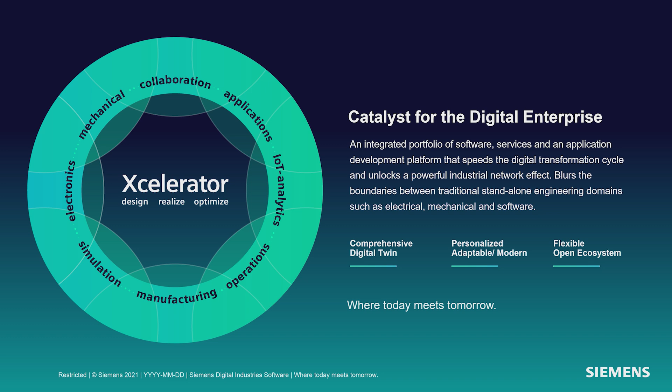Xcelerator is an integrated portfolio of software, services, and an application development platform that really speeds your digital transformation. So no matter what you're doing, whether it's mechanical, electronics, or manufacturing, we have you covered.

And it all starts with Solid Edge. Solid Edge is your on-ramp, if you will, to digital transformation. You're probably familiar with lots of Solid Edge capabilities for sheet metal, 2D drafting, etc. But maybe you need to go beyond that with the whole Solid Edge portfolio and Xcelerator, whether that's managing data, doing technical publications, simulation, or electrical, it's all there for you.

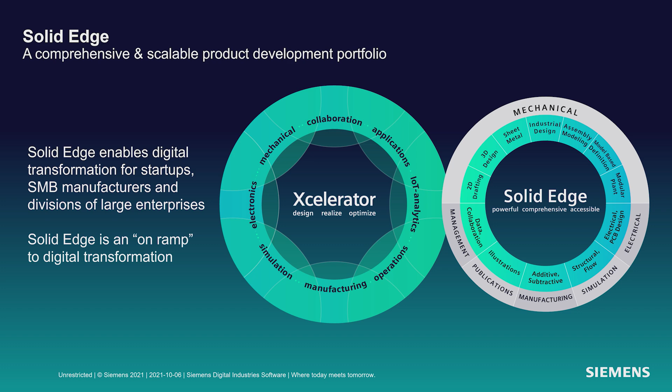What we see is customers doing amazing things with Solid Edge and the Solid Edge portfolio. For example, Innovates, a company in Belgium that makes mobile charging stations, is able to take Solid Edge and PADS Pro and use those two together to do great things. They don't find that level of integration in other engineering software.

And I love what Alan has to say: the software has a great holistic design approach, and that's what we like to see and how we can bring you more productive software.

So let's talk about Solid Edge 2022 itself—engineered to grow your business. There's so much in it, we'll only be able to cover some of it today.

Things like Xcelerator Share, allowing you to collaborate with customers and suppliers. Or CAD Direct, integrating CAD files directly into your system from other systems and bringing them directly into Solid Edge seamlessly. Point cloud visualization, big scans of plants, being able to design your equipment in context of that big scan. And Solid Edge Design Configurator, a whole new capability to configure your designs quickly and easily for your customers.

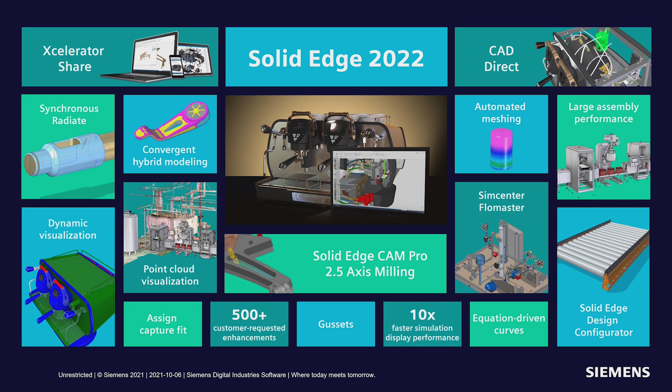Now, as we go through our discussion today, we're going to be using two different data sets because there's just so much to see, such a broad range of functionality with Solid Edge. We'll be working with an espresso maker from Fiamma, a company based in Portugal, and we'll also work with a product from Bergner, a company based in Switzerland that makes chemical and pharmaceutical custom machinery.

So let's start by talking about mechanical design, and let's start with CAD Direct. CAD Direct lets you seamlessly integrate data from other systems into Solid Edge without translation and automatically take updates. We'll also talk about convergent modeling—we've been working on this technology for several years now, and it's getting very sophisticated: the ability to integrate mesh models with BREP or solid models in one seamless way. So let's look at that with Jeff now.

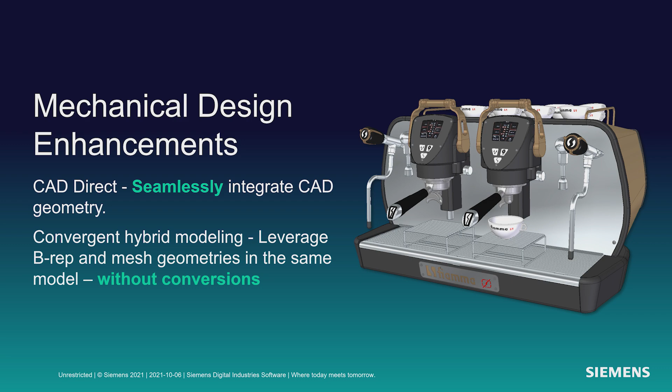Thanks, Dan. First, we'll take a look at subdivision modeling. In this example, we will add support members to the base of the Fiamma espresso machine. The new subdivision bridge command can be used to easily connect edges or faces of subdivision cages and create a lofted structure between them. Here you see an example of that, where we'll select the faces of each subdivision model that we want to loft between.

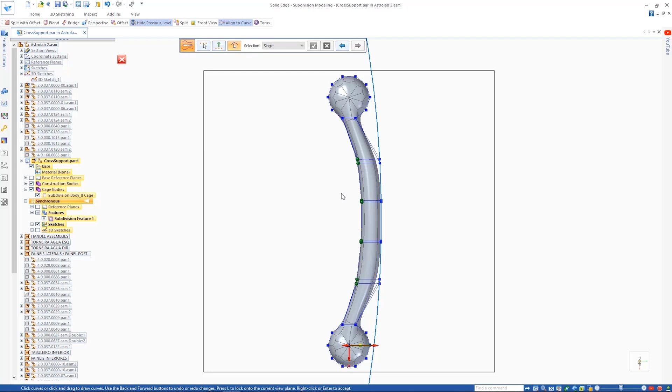Then we'll add the control curve to help us further define the overall shape. Next, we'll be using the new Align to Curve command to further define the shape of the part. Simply by selecting the cage vertices to define the direction and then pick the curve, it automatically maps those vertices to the curve. You can even sketch your own shapes and curves inside the context of the command. Even gesturing is supported for inking of your curves.

Here we'll show another option called Split with Offset to add some pockets to support the rubber feet of the support. A simple selection of the edges with an offset allows you to pull to create the pockets for those rubber feet. Next, we're going to replace the handle with a new design that's been 3D scanned.

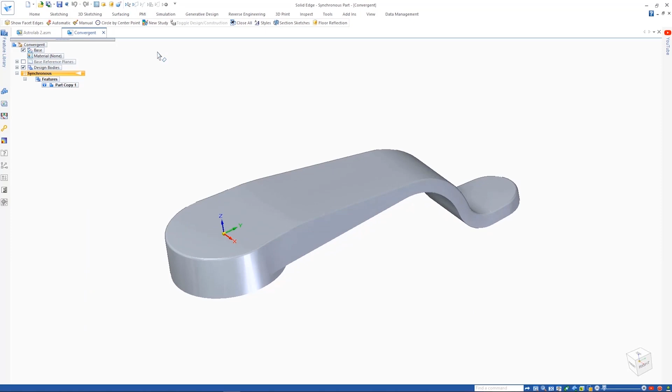This result is a mesh model that we import. We can visualize the mesh with the new Show Facet Edges command. In this case, we'll clean up this model a little with the Remesh command.

Now, faces have automatically been identified and the sketches are added to the planar faces of the mesh. We add a series of cutouts in order to reduce the weight and improve the appearance of the part. Notice the resulting geometry isn't faceted. Solid Edge now seamlessly combines mesh and B-rep geometry in the same body or part.

We'll add additional cutouts to reduce the material. Once the cutout is complete, it can be patterned.

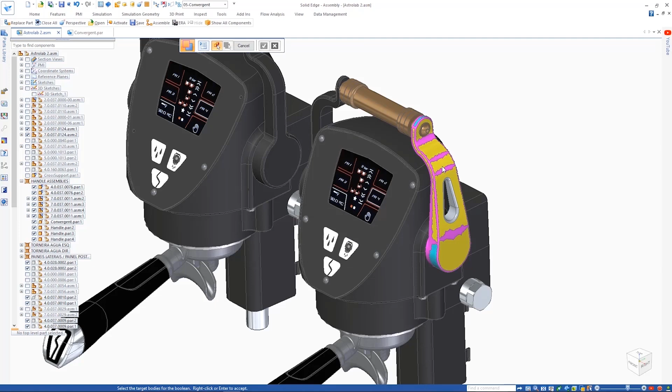Finally, we're back in the assembly where we'll replace the current handle with the new meshed handle. But you'll notice the mounting holes are missing from the component. This can easily be solved by doing a Boolean operation using the mesh model as the target and the components from the assembly as the cutting geometry. These new capabilities further enhance your ability to use mesh models in your design process.

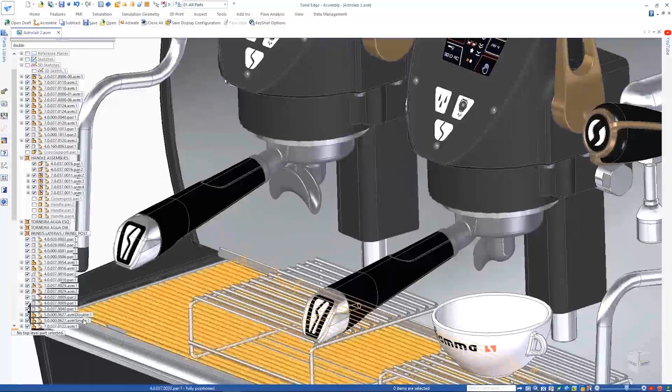Now we'll use the new component finder in the Solid Edge Pathfinder and we'll search for the desired filter holder handle, which is designed as a family of assemblies. One of the versions is designed for a double espresso shot, the other is a single espresso shot.

Opening the drawing of this assembly, we'll use the new family of assemblies parts list to place a table and detail the parts used for each member.

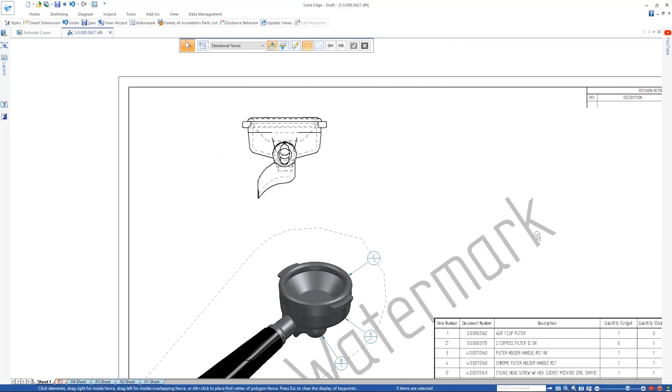Now we'll look at some enhancements to dimensioning in Draft. Dimensioning to virtual intersections or arcs of rounded edges is now supported. We can also choose to display projection lines to those intersection points. Watermarks are also used to convey important information on the drawing. We'll change the existing one so that it retrieves the document status for the drawing property text.

The new CAD Direct command enables us to use foreign CAD data, geometry, and assemblies in Solid Edge directly without requiring any translation. The water boilers that you're looking at here were designed in NX. Once inserted into Solid Edge, they can be positioned just like any other assembly.

Since we need two of these, we'll simply copy one to create the second. Notice the boilers aren't quite in the right location. We'll go back into NX and make the changes needed to the mounting bracket such that they'll be in the right position. Since Solid Edge has associative links with NX, a simple update brings the changes in.

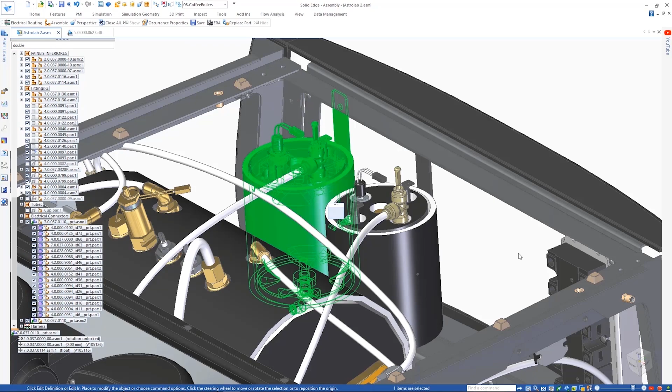Next, we'll look at electrical routing enhancements. Solid Edge now supports the display of bicolored wires, allowing us to change the display of this ground wire to be striped green and yellow. Various pattern types are supported as well, including single stripes, helical stripes, zebra stripes, and dashes.

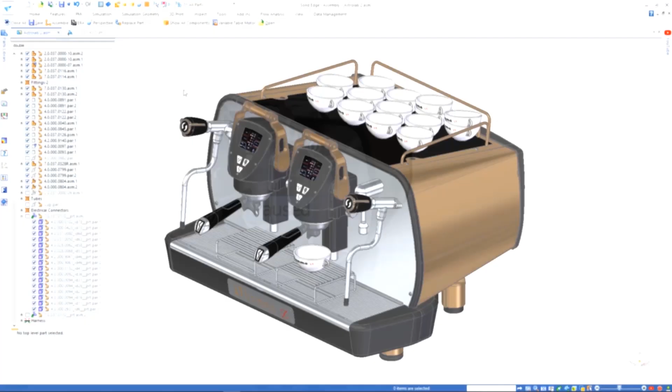And finally, KeyShot, the best-in-class rendering solution, also sees some impressive updates. Decals defined in Solid Edge may be automatically transferred, saving time and effort, which can be seen here on the logos and the cups in the digital scene.

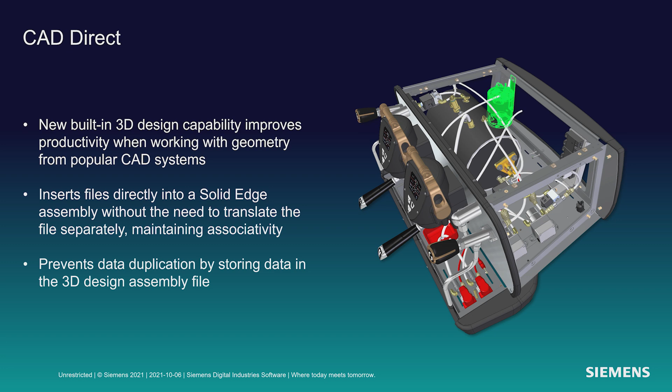It's all CAD Direct. And what about convergent hybrid modeling? You saw taking triangle meshes and B-rep solid models, pulling that all together into a single cohesive model, significantly reducing your design time.

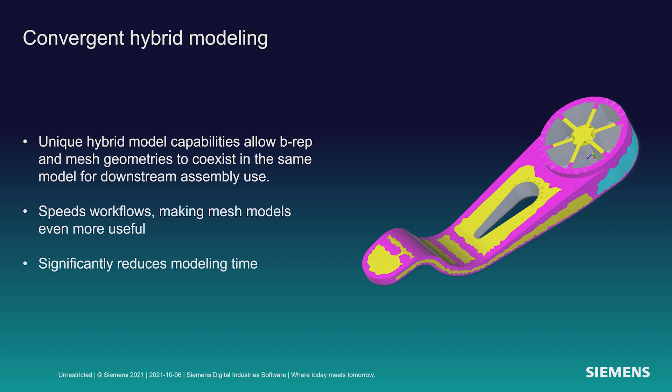Let's talk about some other mechanical design enhancements, some other great things in here. Point clouds. It's becoming fairly common to be able to scan an entire plant or factory and bring that data forward. We can now bring that data into Solid Edge so that you can design in the context of that factory or plant.

What about large assembly modeling? We see people first building parts, then assemblies, then whole factory lines. Assembly modeling in Solid Edge keeps getting faster and faster and faster, best in the business. And Synchronous Radiate, an amazing new command within the synchronous modeling environment that allows you to deal with radially symmetric parts and edit those effortlessly. So let's take a look at that now, Jeff.

Thanks, Dan. The first thing we'll do is take a look at a new assembly preview mode. This mode allows you to very quickly open Solid Edge components and very large Solid Edge assemblies lightning fast. In preview mode, you can manipulate the view, show and hide components, and apply display configurations. In this case, we'll isolate the most critical part of the model we want to edit using a configuration, then tell the system how we want to open only the components to be edited, saving you time and memory.

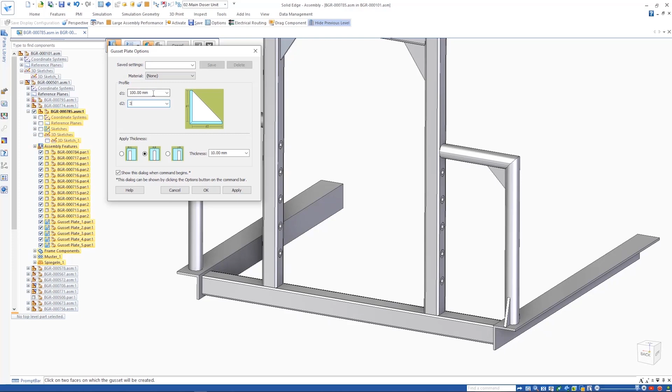Another time-saving enhancement is the gusset command. We now allow you to automatically add gussets to a frame structure. Here you can see the user interface. You can define these gussets in any shape and size you desire. Then you simply select the frame element, position where the gusset is to go, and the system automatically creates the component there.

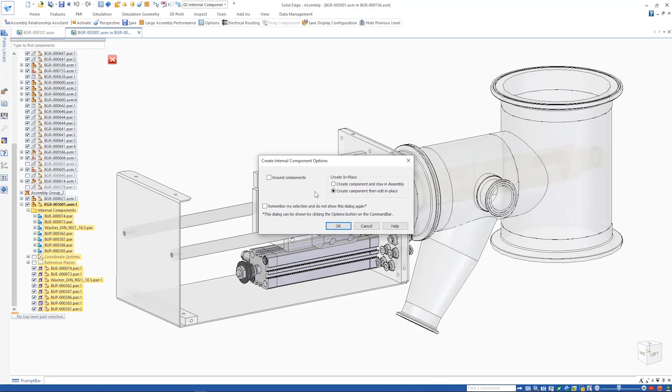If we continue down the internal components theme introduced in the last release, we now allow you to create an internal component and actually create the model geometry directly inside the Solid Edge assembly. We've introduced this new assembly modeling capability that gives you the ability to create the entirety of a design without any need for an external file. Here we have a pneumatic cylinder which will be imported as an internal component. We need to add a bracket to this assembly, but since it's a purchased part, we'll just create this as an internal component, again saving the need for external tracking of files.

If you'll notice during sketching, a pop-up menu allows you to quickly access commands relevant to your selection. This is new for Solid Edge 2022.

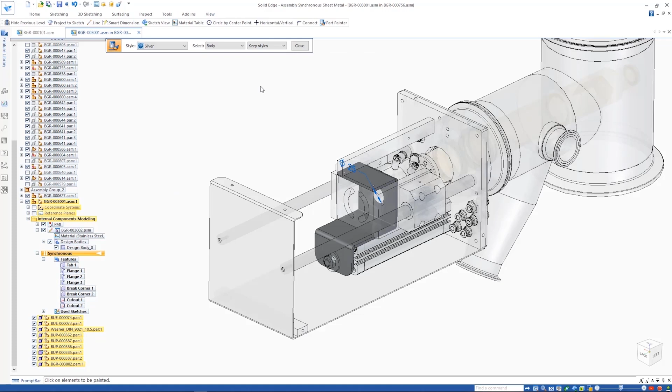So we've defined our sheet metal part. We also have to give it a material definition and a gauge definition. In addition, we're able to create geometry and reference the components from the assembly, whether they're internal components or real components in the assembly. So again, we're defining the material gauge for the sheet metal component, and we've defined this component completely inside the context of this assembly.

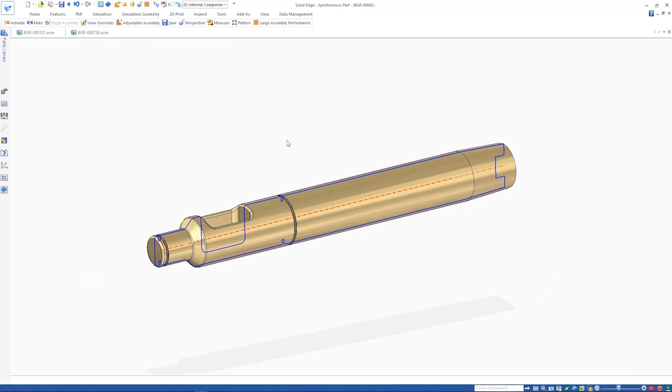You're also able to drag the component, doing animations using both internal components as well as the real component combined. The new component finder speeds up the process for locating parts within the assembly. You simply key in the name and it finds the list quickly. Here we found a shaft, and we used the new radiate command to edit the radius or diameter of the shaft component. You simply select the shaft, putting the component in the select set you wish to change, and then Synchronous does the rest.

In this particular example, we want to include the pocket in the radiate and the offset option. Simply selecting that pocket and including it allows that to be done.

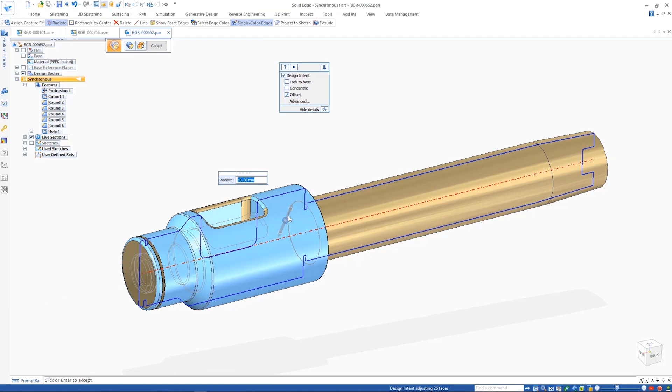A new Assign Capture Fit command allows relationships to be predefined on a component while in the context of the part. Here you can see that Capture Fit relationships already exist. We'll add a new Capture Fit to the collection and save it to the component. When I place the handle into the assembly, all you have to do is select the component and select the mating components you want to mate it to, and the handle automatically snaps into place. It's as easy as that.

Here's another example where we have a handle that needs to snap to 5 new locations. Again, the Assign Capture Fit makes it easy.

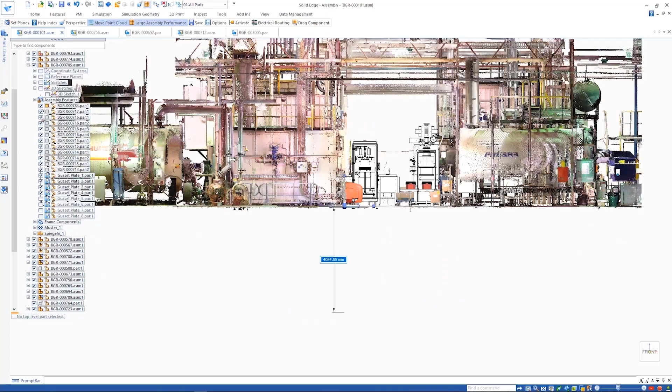Solid Edge now has the ability to place point clouds within the context of your design. This allows you to reference and visually indicate where your components will be placed inside a large assembly. Solid Edge supports multiple point types and then allows you to position your component inside the context of the plant design. The point cloud can be easily repositioned. Clipping planes can be used. You can even measure to the location of the point clouds relative to your design.

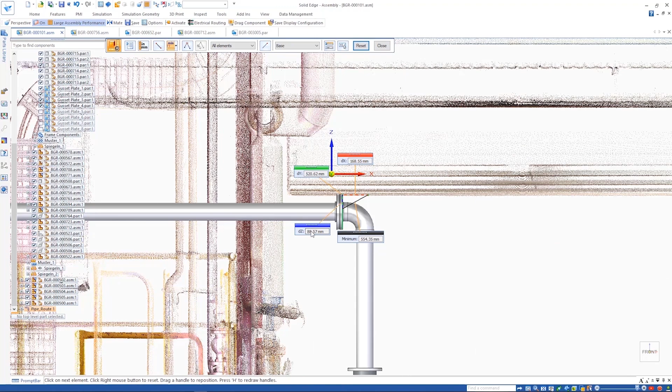Here you see that the tank component was in the wrong position and it was moved to match the point cloud and the plant definition more precisely. And that's it, Dan. Back over to you.

All right, thanks, Jeff. So many great things to see in there. But again, something I really want to highlight is a game changer: point cloud visualization. The ability to take in scans, gigantic scans, millions or billions of points, and be able to look at those in the context of Solid Edge and integrate your design directly in there, designing in context of that point cloud. As you can see, they're full color, they give the full feel of the plant or factory. Really amazing stuff.

And we see that our customers really love this new technology. Benjamin at Bergner, for example, eliminated a lot of tedious manual effort. It's just so much easier with the new point cloud technology.

And what about large assembly modeling itself? Order of magnitude increase in large assembly modeling performance. So you have that preview mode where you can very quickly bring up the assembly, very massive assemblies, decide what you want to work on, and then just bring in that bit of the assembly. Really improve your productivity.

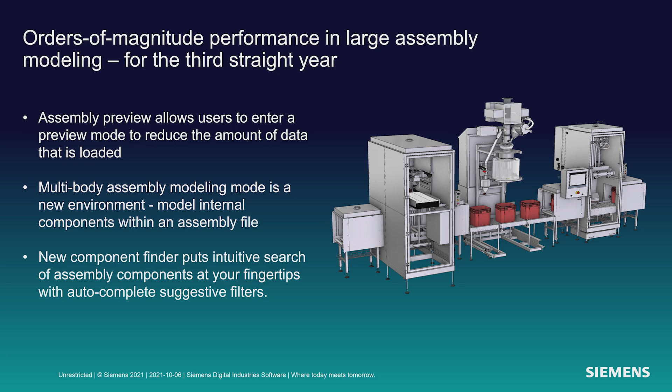We see that folks are already taking advantage of this. Our beta customers have been using this, like Luca Carminati at CMS, doing much faster work and saving a lot of effort on their designs. And what about synchronous radiate? Really amazing stuff if you're working on axisymmetric parts. Being able to make edits without having to do any extra effort happens almost magically. Great stuff.

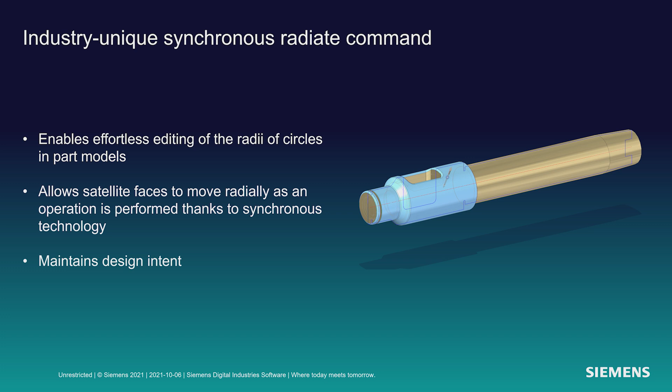Okay, next up is Solid Edge Design Configurator. I'm very excited about this. If you're doing any engineer-to-order or configure-to-order type products, the ability to very quickly change your designs and have new quotes very quickly. Let's take a look at it with Jeff.

Thanks, Dan. The new Solid Edge Design Configurator allows you to design multiple product variants directly in the context of Solid Edge. In this example, we'll configure a variety of conveyor designs. The first step is to select the component to be configured. The next step is to define the master input parameters of the configuration. In this case, it's the length and width of the conveyor plus the pitch of the rollers. Values can be easily added for any parameter, and images can be included to help the end user identify the needed inputs when configuring the model.

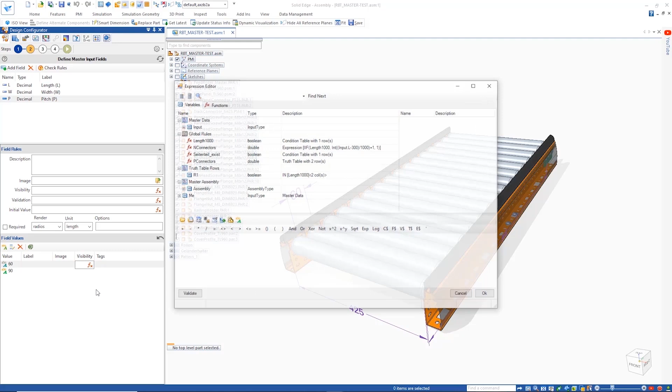Defining a new input parameter for the pitch of the conveyor, we'll quickly configure the name, type, label, and render style to use radio buttons. The pitch value of the conveyor can be customized between 60 and 90. However, since different lengths of the conveyor require different pitches, visibility rules need to be applied. This is done using a simple expression to define the intelligence. Here, the rules are being validated to ensure consistency and proper definition have been made. The function is copy and pasted to allow you to easily reuse formulas without including them again. Skipping to the last step of the configuration, we can see the configuration form is properly created.

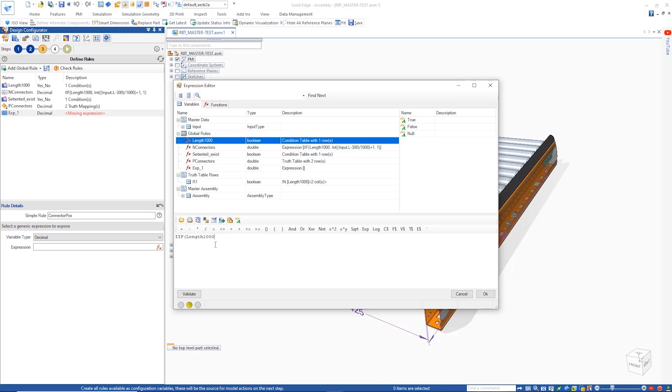Next, defining the rules for the process. Here we have multiple rules to drive and configure the connectors at the bottom of the conveyor. We'll use a combination of simple condition and expression rules and a truth map table to work out the number and positions of the connectors. All rules can be quickly validated. Finally, we specify the actions to be taken. Here, variables are set and components are replaced to satisfy the input parameters.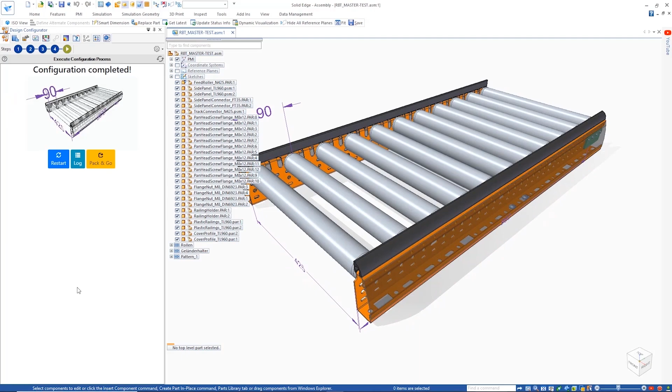A rename model action will ensure our final assembly is renamed appropriately and also creates the other necessary outputs, for example a step file as shown here. Now we can run it quickly and create as many configurations as needed. A newly generated configuration can easily be shared with Pack and Go. The configuration logic is all stored within the CAD model. There's no need for any further plugins or external resources.

And with that, Dan, I'll hand it back to you. All right, thanks, Jeff. So as you see, with the Solid Edge Design Configurator, you can accelerate your configure-to-order and engineer-to-order processes and create compelling sales proposals. You'll also see that it really error-checks for you and creates a nice dialogue for your users to interact with, so you can very quickly configure new products.

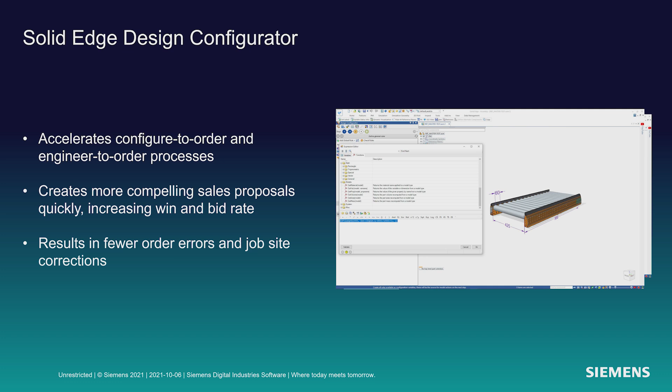What about CAM? Solid Edge CAM Pro. Tried and true technology developed over the last 40 years. A lot of users using it today and enjoying the benefits of it. But what if that technology was available to all of you, all Solid Edge customers on maintenance? That's what we want to introduce to you today with Solid Edge 2022. Jeff? Thanks, Dan.

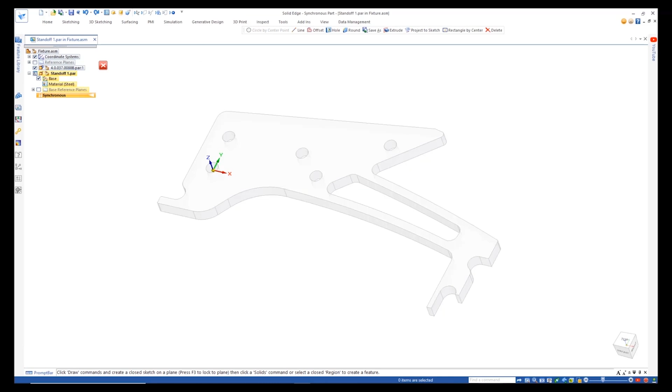Here we'll be using Solid Edge CAM Pro to create the manufacturing toolpath for the rear legs of the Fiamma espresso machine. First, we'll use the Solid Edge assembly tools to create the shape to represent the stock parts, and also the parts that form the fixture assembly, which includes the standoff plate as well as additional fixing holes from the standard database. We'll also make use of supplier catalog in 3D Find It to get the appropriate socket head cap screws to fix the component in the fixture. So as you can see, Solid Edge is a great CAD for CAM tool.

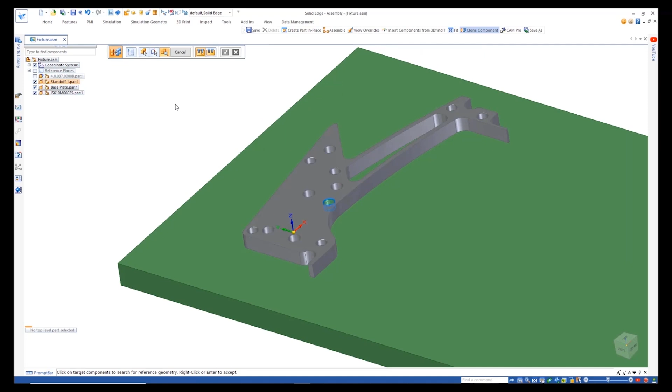We'll need to machine this in two separate steps. Step 1 is to mill the pocket and drill the holes, and step 2 is to machine the profile. One click will send the entire assembly to the Solid Edge CAM Pro application. Note that associativity is maintained to the complete assembly, so if there are any last-minute changes, we can quickly update them and continue the NC programming process.

New for Solid Edge CAM Pro is the ability to create adaptive roughing toolpaths for 2.5-axis operations. This is included at no additional cost. These are faster than traditional toolpaths and extend the cutting life of your tools. Notice the advanced graphic capabilities for validating your toolpath.

Here we'll create spot drilling operations for the 5 holes in the support. Notice the graphical pop-up hints that help us with operation selection. Graphical helps are also available for geometric selection. Each time we select a hole, we get a preview of the machining that will take place. Again, at any point in the process, we can get visual feedback on our decisions.

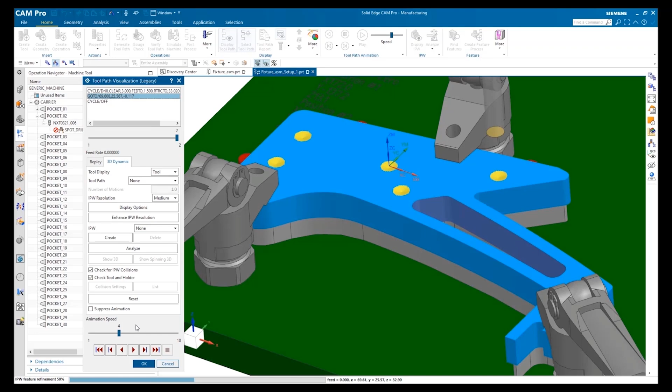Now that our CNC program is complete, let's run through the whole visualization process. Notice you get to completely visualize the entire machining process before committing it to machining.

Of course, no job is finished until it has been post-processed for a specific machine. That's where PostHub comes in. It's an online database of over 1,200 post-processors. You can easily filter and find exactly the one you need. Also, PostHub is constantly updated, bringing you the most recent tools.

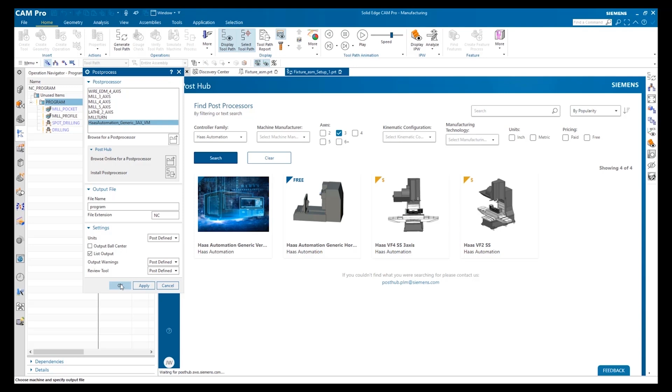All right, thanks, Jeff. I'm really excited about this. There's a great heritage in Solid Edge CAM Pro and our machining technology over the last 40 years. Many people enjoying that technology, but now every Solid Edge user who's on maintenance can enjoy that technology and work with Solid Edge CAM Pro.

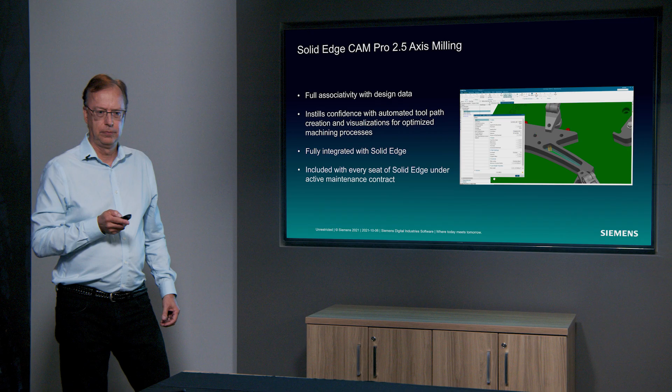Next up is Xcelerator Share. I'm super excited about this. It's a functionality in Solid Edge that allows you to collaborate with colleagues, suppliers, customers very easily. Nothing for you to set up, works on all sorts of devices. So let's take a look at that.

Thanks, Dan. Xcelerator Share allows you to import your CAD models into a secure cloud location. Within that context, you can view, you can rotate, you can show, hide, you can 3D section, you can even do measurements and markups. Here, a reviewer has identified the need for some change in the design.

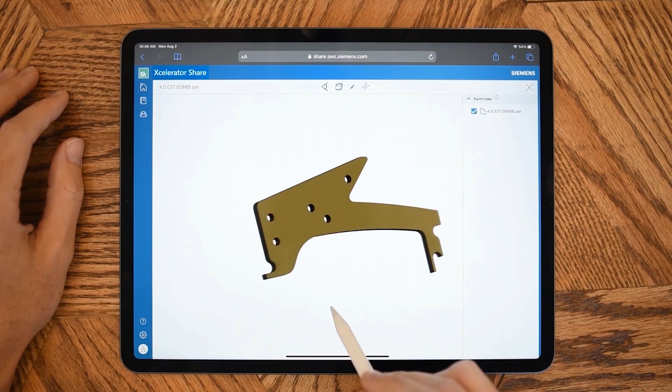The location of the change is identified by a sticky note and a place describing the needed change. Xcelerator Share offers maximum traceability, as all markups are recorded, enabling conversations back and forth on any of the issues you're tracking. It also records who made the markups and when it was made. We can also easily go back to the markups at any time.

Simply save your markups and send them to the designer for review.

With Share, you can also directly connect to Solid Edge, synchronizing your data from your desktop to the cloud. Here we have the same project on our desktop. It's represented simply as a folder. Any data that we have in this folder will get synchronized in the background.

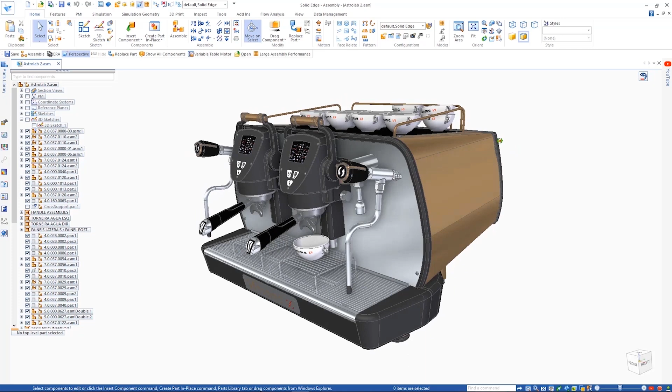In Solid Edge, we can securely sign in to Xcelerator Share and see those same cloud-based projects. The Espresso machine can be opened and we can go right to work on the part in question. The designer can easily access that same markup in the cloud directly from within Solid Edge.

Once completing the change, another markup continues that two-way conversation and collaboration with other stakeholders so that the issues are tracked appropriately.

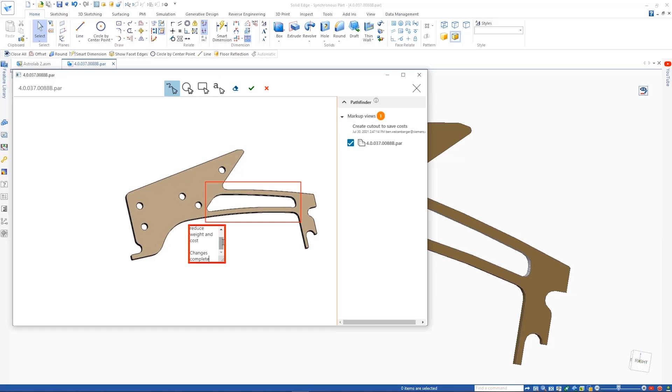Another great feature of Xcelerator Share is the ability to share a project with anyone. Simply enter the email address of the person with whom you'd like to share and choose their access permission level. Here we can choose View, or View and Download, or Edit and Download, depending on how you want to protect your intellectual property. We'll share this design with one of your colleagues and our customers and give them the appropriate access.

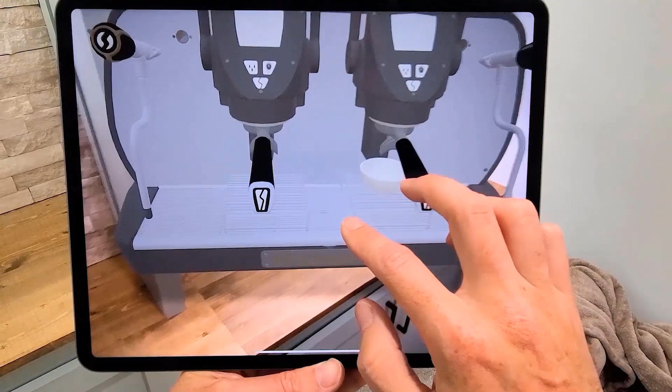Finally, with the Share Augmented Reality feature, you can see exactly how your designs will look in the real-world environment. Snap the design onto any surface seen in the camera lens at the correct scale. The finger gestures can be used to manipulate the model and easily visualize what your design looks like in a real environment. So back over to you, Dan.

Thanks, Jeff. All right, Xcelerator Share. Really great stuff. Next generation cloud-based collaboration that allows you to work inside your company with colleagues or work with suppliers, work with customers. Nothing for you to set up. Works on every device. So whether you have a Mac or an iPad or a Chromebook, it works on all those devices with no special setup. And you saw the ability to write notes that are automatically converted to text, share those markups. Very exciting stuff.

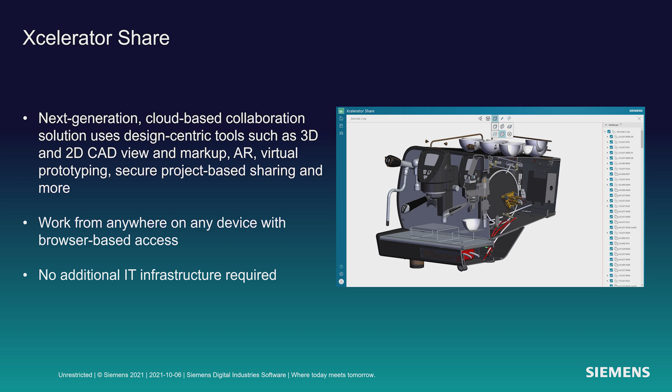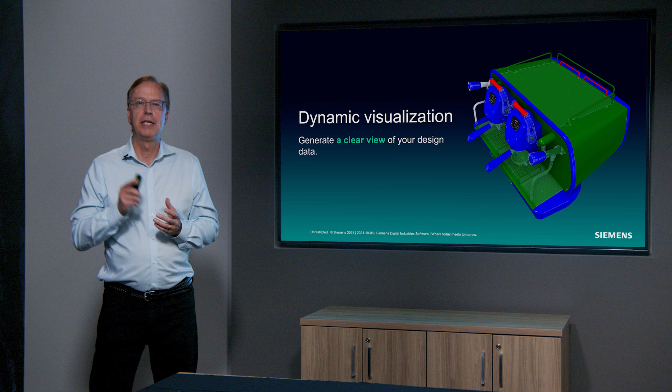Next up's dynamic visualization. You make complicated products, large assemblies. How do you know which parts are from which supplier? Or which parts are of what material? Dynamic visualization will help you with that problem. Let's take a look at that now with Jeff.

Thanks, Dan. Dynamic visualization gives you great capabilities to generate visual reports of your assembly. So what we'll do here is open a Solid Edge assembly using Teamcenter Active Workspace. We'll create a visual report based on the component supplier and material definition. The first thing you'll do is add columns to the user interface, those columns that you want to filter on. Here we've added suppliers and material. For each of those, we'll filter on the particular material and supplier we're interested in visualizing.

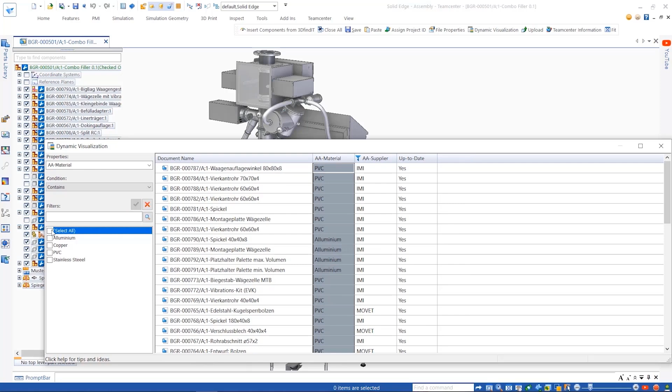Once the rule is created, you simply apply the rule, and the model changes display to show you the rule definition. Here you can see in red the components based on that supplier and material selected. You can also export these rules and import them into various assemblies.

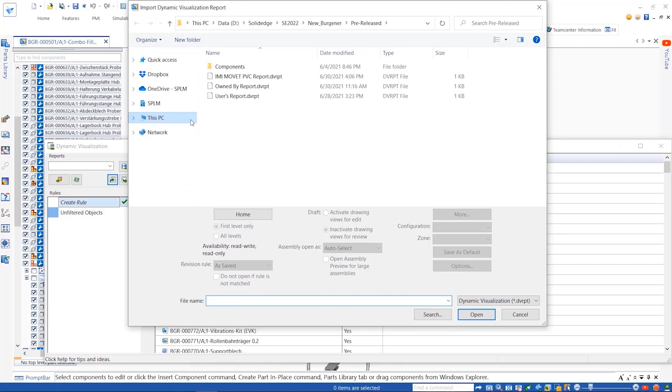Here we have a rule that allows us to identify which user created which components. We'll modify that rule to allow us to identify work in progress as well as components created by Pat. We can highlight those, select them, and then go into edit mode. Here we'll see we need to add a warning light to this box.

We use 3DfindIT to find the particular light from the particular supplier that we want. Once we've identified the right one, we'll generate the component in Solid Edge. But in this case, the component already is contained in the Teamcenter database, so instead of replicating that in the database, we'll simply reuse what's already there.

Also in Solid Edge 2022, we were able to take advantage of the project definitions within Teamcenter. Here we can see we've assigned the components to a particular project in Teamcenter.

The Solid Edge built-in data management also supports dynamic visualization. Here again, we'll display the assembly coloring based on the material type to ensure that we have the proper materials throughout the model.

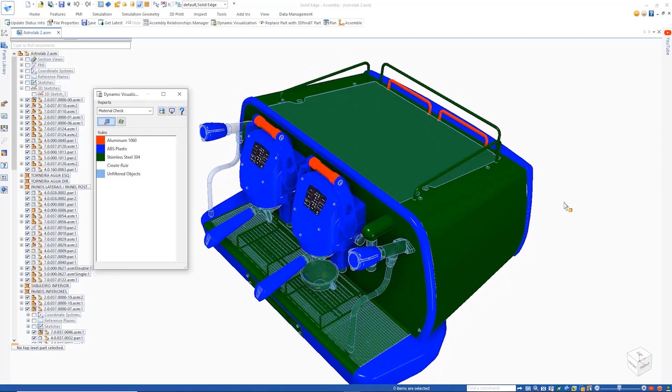So again, the rule is applied, visually it's displayed, and you'll notice that the red handles should be green. Those should be stainless steel and not aluminum. So we'll send those back to the designer to be reworked and have the proper material applied.

Once applied, we can then do an auto update of the status, and the system will automatically show us the status and then update to get the latest component. In this case, the handles are updated with the proper material. We will rerun the same rule, and you'll see that now the handles are green and therefore in the correct material.

Another nice enhancement is that we've modernized the file properties dialog. You can see here it looks much more user-friendly and lets you easily create new custom properties as shown here.

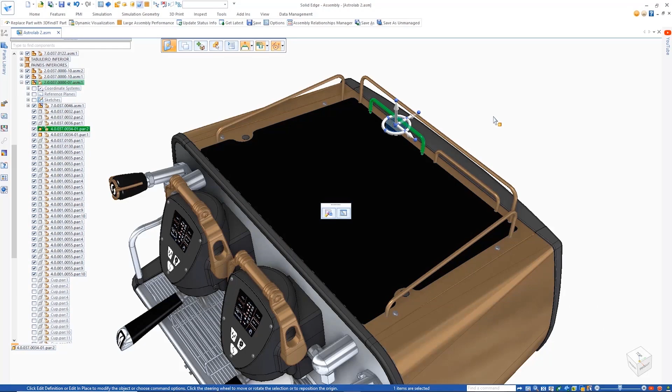This next example will use replace part with 3DfindIT. 3DfindIT has the ability to take a component and use that component's geometry to search the catalog database for similar components. Here, once the component is found, we identify the supplier we desire, and with a few simple clicks, that component is inserted into the assembly, replacing the previous geometry.

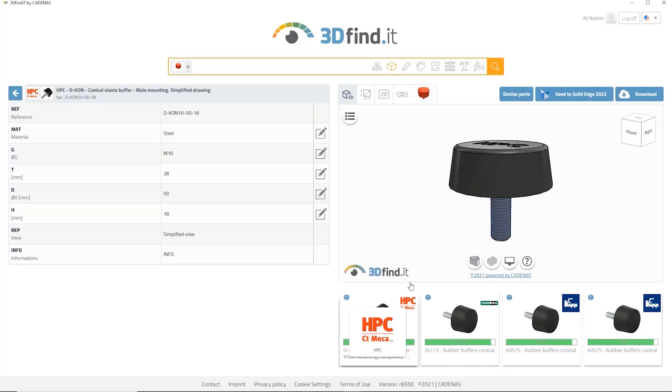And lastly, we've added Pack and Go directly to the Windows Explorer UI, making it easy for you to share your data without having to open the assembly within Solid Edge. That's it, Dan. Back to you. All right. Thanks so much, Jeff.

So many good things you saw in there with 3DfindIT and the ability to replace components, search directly using geometric shapes, and so on. But I want to highlight to you this dynamic visualization. Being able to say, well, what supplier do I have for the different components? Color code for me all the things that are stainless steel. Color code for me all the parts that are in work. Amazing technology that would save you a lot of time and money.

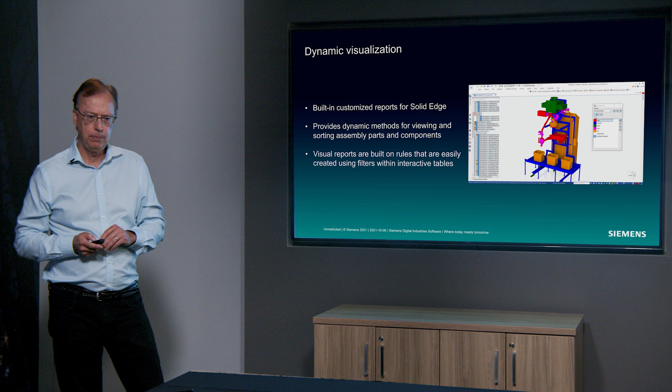Next up is Solid Edge simulation. We have some great enhancements in there, some game-changing enhancements in terms of the ability to remesh parts using the body mesh command, and some other great tools. Let's take a look at those, Jeff.

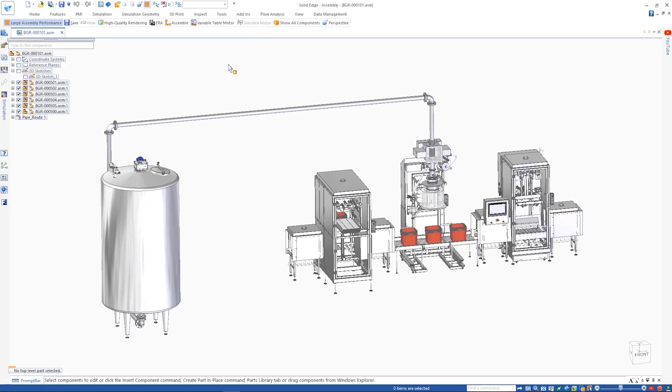Thanks, Dan. We'll start by looking at a new boundary condition allowing the user to apply hydrostatic pressure to a model. We'll apply a configuration that gives us the geometry of interest. Here we want to look at this tank on the left and do an analysis, assuming that tank is filled with liquid.

So we'll create a static study, and in the definition of the loads, we'll use the new hydrostatic pressure command. All you have to do is identify the surface to apply the load, identify the depth of the liquid in the tank, and then provide the density of the liquid within the tank. Solid Edge will do the rest.

To finish the analysis model, we'll apply constraints to the bottom of the tank and then perform the meshing and analysis as needed. Notice on the new mesh dialog a body mesh. This is proprietary technology from Siemens that does a really good job meshing complex models. Some things that couldn't be meshed before can now easily be meshed much quicker and much more reliably than in the past.

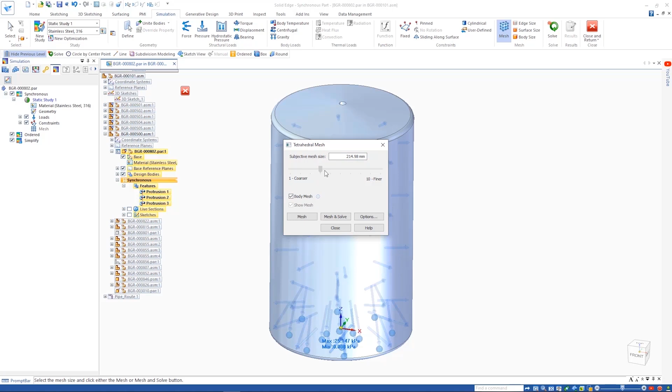So here you see the result of the hydrostatic pressure load in this tank. We'll change the liquid level in the tank and run the analysis again just to validate that this tank will withstand the pressure exerted on it in production.

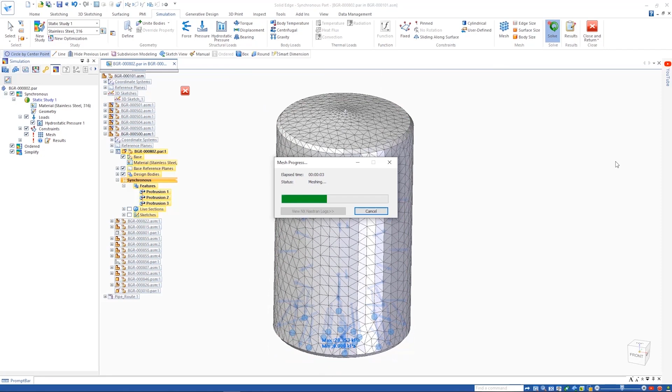There you see the animation of the stresses, and they show up in the obvious place at the bottom of the tank where you might expect.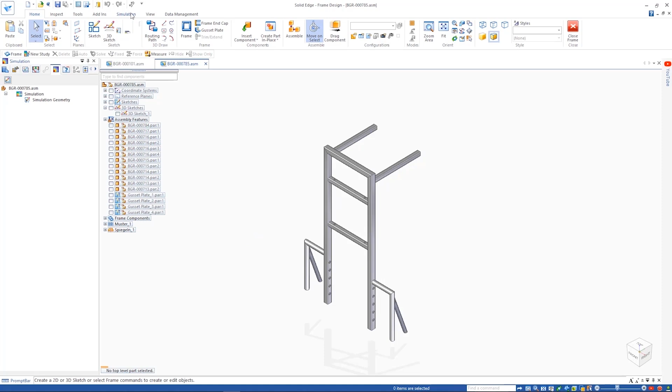Another great enhancement we have in simulation for Solid Edge 2022 is improvements to beam meshing. Here we're taking a frame structure and creating beam elements for the finite element analysis. Notice that the rigid connectors were automatically placed. We've improved significantly our ability to create those connectors automatically without any user intervention.

Here the user has selected the bottom and changed some of the parameters to get the rigid connections correct. The bottom of the frame is then fixed, loads are applied, and the analysis is run.

Once complete, you'll see some enhancements to the output, to the post-processing for this model. We now can post-process and display contours using von Mises stress, and we've also improved factor of safety stress contours based on those same von Mises stresses.

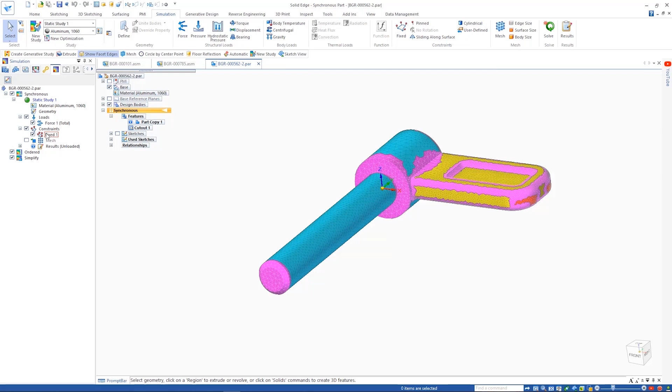Now back to the assembly, we're going to do another analysis on the pin within this assembly. You notice this pin is a mesh model. Simulation can now perform analysis on mesh models. You simply apply the boundary conditions, the loads and constraints where needed, and run the analysis. Here you see the result for the pin on this mesh model.

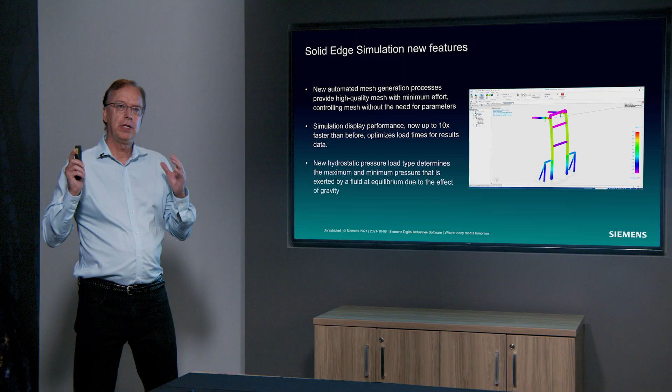Lots of great new things in there. Obviously, the hydrostatic pressure load takes a lot of work out of the process for you. The way the beam elements are automatically connected together, great stuff. But also that body mesher—you can take a mesh that's very irregular, very difficult, and remesh it with the body mesher. It's a game changer for analysis.

Next up is SimCenter FlowMaster for Solid Edge. If you're doing any types of products where you have piping and you need to do analysis on the piping or design on the piping and the flow within the pipes, SimCenter FlowMaster for Solid Edge is for you. Let's take a look at how it works with Jeff.

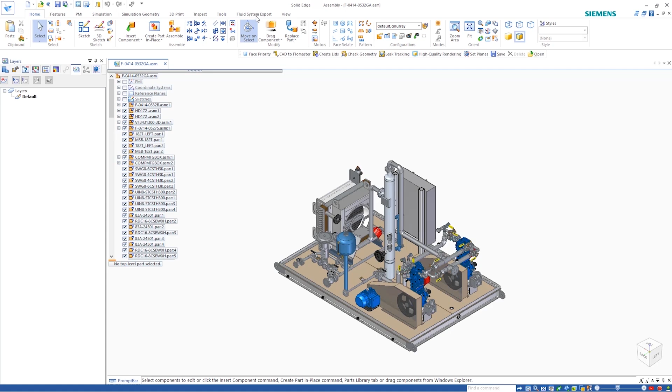Thanks, Dan. The unique CAD to FlowMaster technology extracts the geometry from the Solid Edge assembly and automatically creates the corresponding fluid volume that exists inside the pipe runs and components. During the process, a face can be selected to give the length scale and convert the system to a subsystem.

The abstraction process is fully automated. There is also full control over the fidelity of the model, which can be adjusted with the slide bar. Individual elements can be inspected, deleted, and merged.

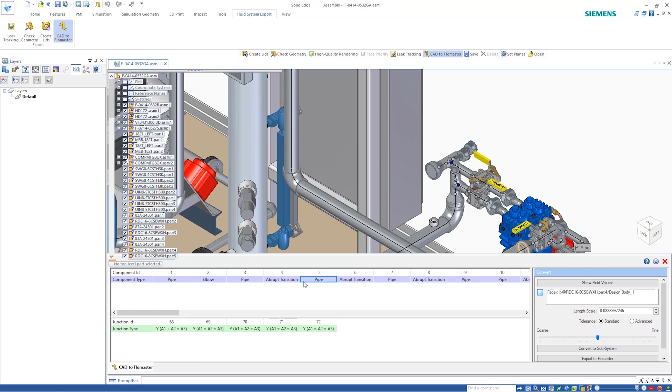Once the network configuration is defined, the geometry can be exported to FlowMaster. Following export, the file will be saved for reuse, then automatically opened in SimCenter FlowMaster for Solid Edge in the Subsystem Import Wizard. The CAD geometry, centerline, and component connections can be seen in the wizard, and the model can be rotated to the desired projection when the network is created.

On selecting Import, a new subsystem will be created for review. The entire subsystem can be used to create a model, or individual pipelines can be extracted into their own subsystem.

For a flow analysis of this model, we are going to extract the pipe from the two compressors to the center vessel. We create a second subsystem from the first and save it in the subsystem catalog.

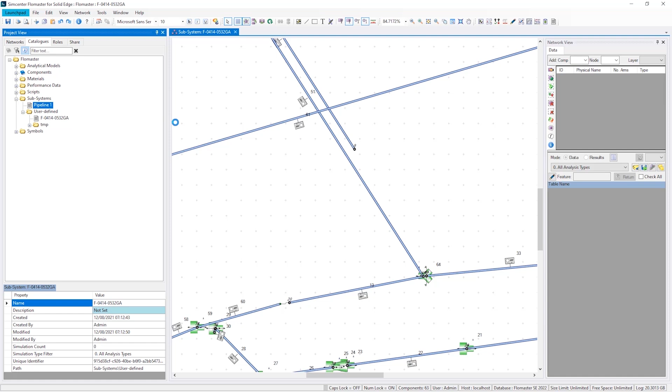We'll now add the subsystem to a new network and specify the boundary conditions using pressure sources. We'll specify the compressor outlet pressure and vessel inlet pressures.

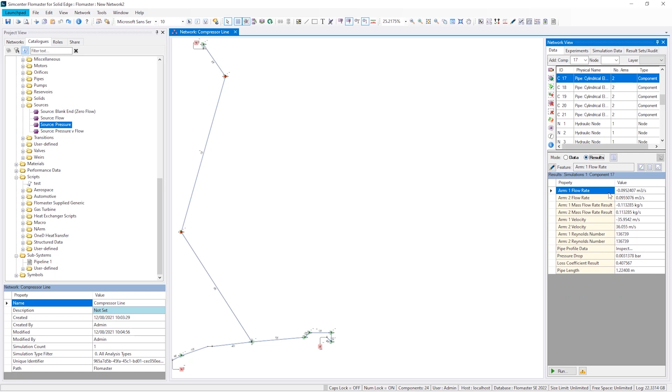For this low pressure system, we'll specify air as the working fluid and run a static simulation. Following the simulation, we can look at the results for individual components or look at the whole system using network visualization. With this, we can quickly oversee flows, pressures, and velocities.

Next, we'll look at the effect of a pressure pulse from the compressor on the system. We'll specify curves defining the pressure pulse at the source, and then run the transient simulation.

Following the simulation, we'll look at the flow into the tank, where we can see the effects of the pressure pulse from the compressor. Then, moving to the compressor outlet, we can enable transient visualization to see the variation in flows, and that the larger flow is from the left-hand compressor. And back to you, Dan.

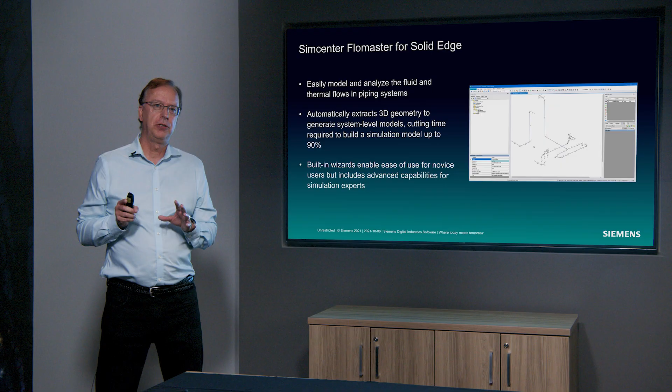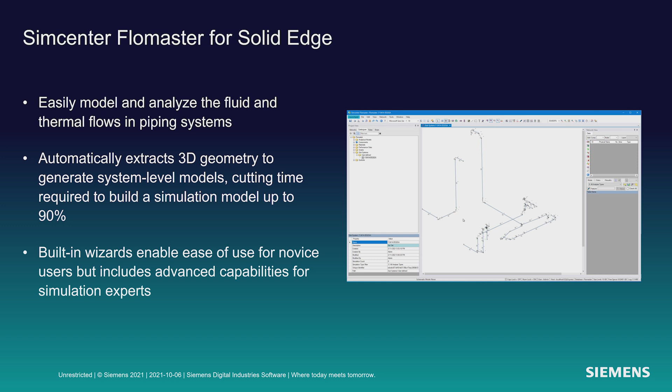Thanks, Jeff. Some super advanced technology there that we're happy to bring to the Solid Edge community. This is one of the advantages of the Xcelerator portfolio, the ability to bring advanced technology to you. Great capabilities here in terms of easily modeling and analyzing the fluid system, with automatic extraction of center lines from the 3D geometry, so you can go straight into analysis and see what's going on with your system.

So that was a feature-packed release, right? We went through a lot of stuff, many things in Solid Edge 2022 that are going to help your business. There's simply so many amazing things in there. The number of improvements are enormous, and that's been echoed by all of our beta customers. Everyone is saying this is the best release of Solid Edge ever.